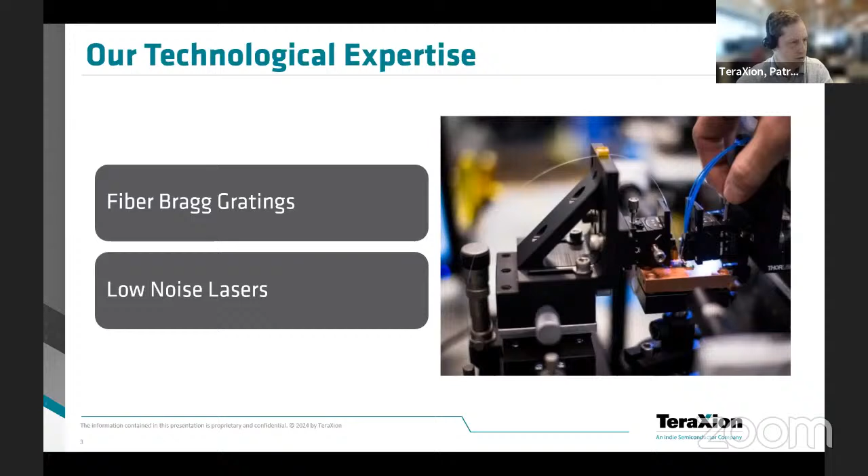And we also have a low noise laser product line since 2005, actually. We've always differentiated ourselves through the quality of our control electronics. And for a few years, we started developing our own chip. This is what's new with our laser product offering, and that's the topic of today's product introduction. So if we talk about the LXM, what is this product and how does it bring value?

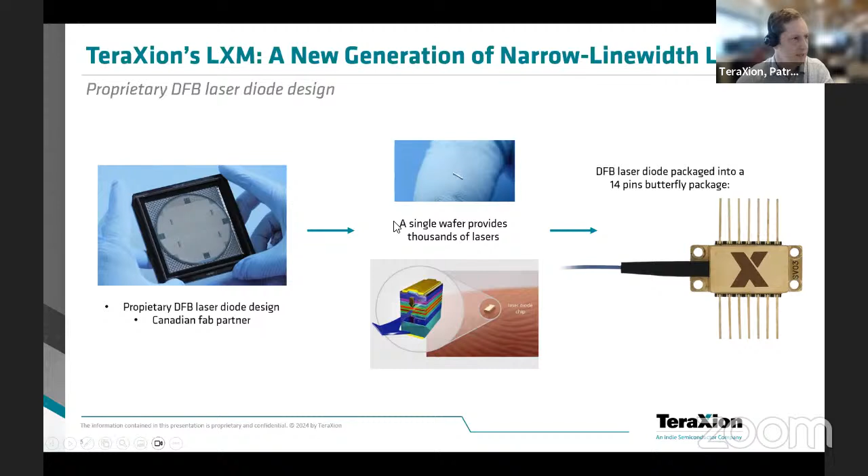So it's a laser module based on a DFB monolithic semiconductor chip. TeraXion now manages the process from wafer to chip to packaging into a sealed and temperature controlled butterfly. So we're fabless. We're working with a Canadian fab company, and the LXM is really a module offering. So it's a turnkey module with low noise drive electronics.

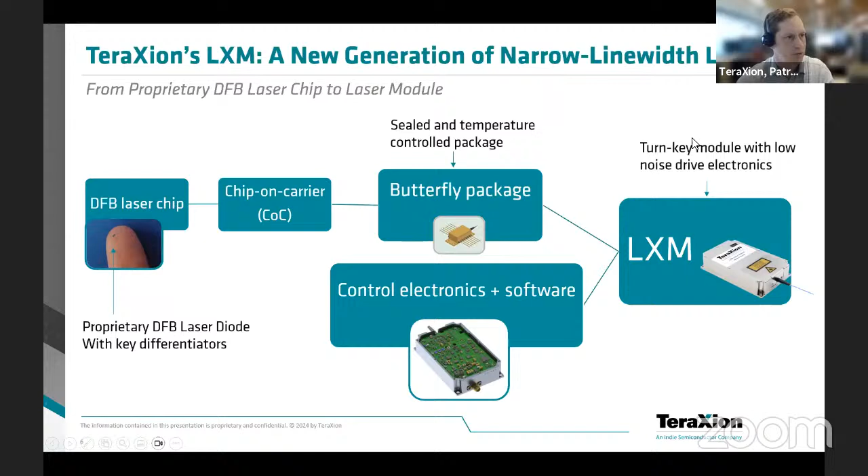I've mentioned the chip. It's a chip we worked hard on the design that displays key differentiators at the performance level. As I said, we manage the process to chip on carrier, packaging into the butterfly, and we add on top of this a TEC controller, low noise current source, frequency modulation circuit to offer a turnkey module. There are two flavors, and by the way, I forgot to mention, the wafers we designed so far are in the vicinity of 1550 nanometers. So this is the wavelength we're working with today.

I've mentioned two flavors: either a DFB laser under direct drive, what we call the LXM-S for standard offering. And we also have an ultra narrow linewidth version where the DFB is frequency locked on a frequency discriminator. This is the LXM-U for ultra narrow linewidth. The frequency locking circuit is built in the electronics. Same for the frequency discriminator, it's built in the butterfly package.

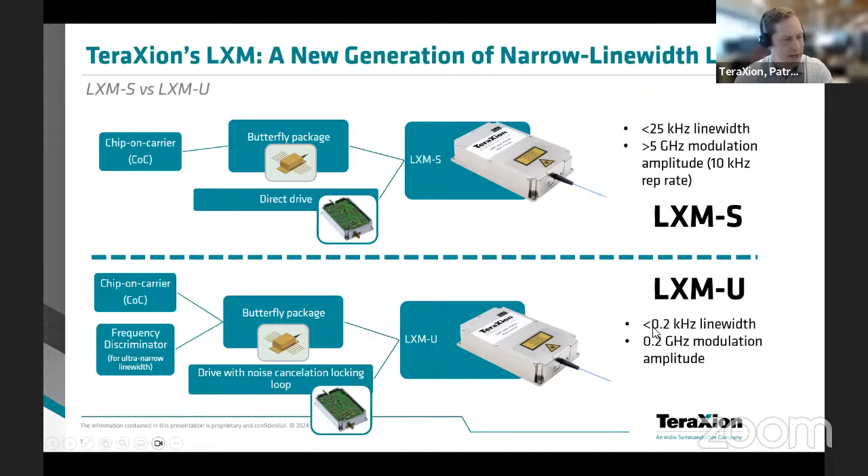In terms of the main performance difference between those two models, the direct drive is the intrinsic linewidth of the DFB chip, below 25 kilohertz. With the frequency noise cancellation circuit, we achieve ultra narrow linewidth. For the LXM-S, the modulation circuit is directly connected to the laser electrode. What limits the modulation amplitude is simply the protection circuit of the modulation circuit. For the LXM-U, considering the laser is slaved on the discriminator, we do not have the same degree of freedom, and that's why the modulation amplitude is limited to 200 megahertz.

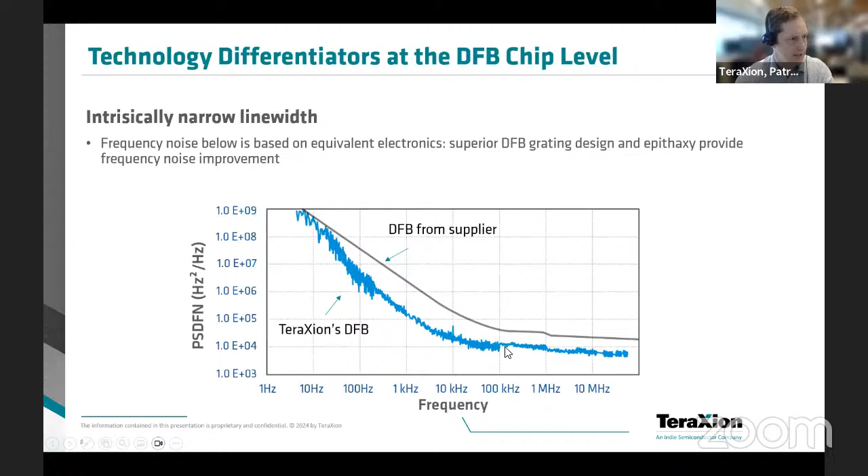Now, if we look at the technology differentiators at the DFB chip level, it's an intrinsically narrow chip. This graph shows a DFB from a supplier packaged with our low noise electronics compared to our own DFB, where we see we worked hard on designing a chip that was intrinsically narrow. The second differentiator at the chip level is that we developed a chip with a flat frequency modulation response that was mandatory for some of the projects we have internally with frequency locking and phase locking loops. So it allows high performance frequency locking and phase locking of the laser.

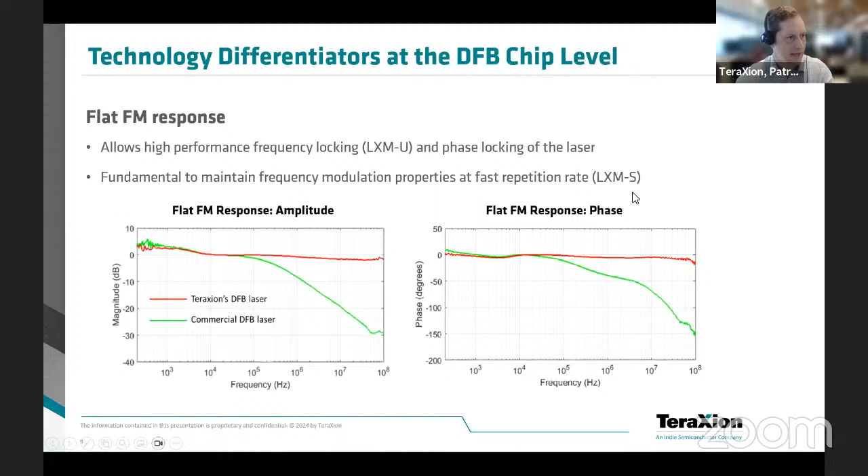For a rugged and reliable laser designed for industrial applications, this low level of frequency noise is pretty unique on the market, and it can give enhanced sensitivity as well as range to sense phenomena that have this signature in those frequencies.

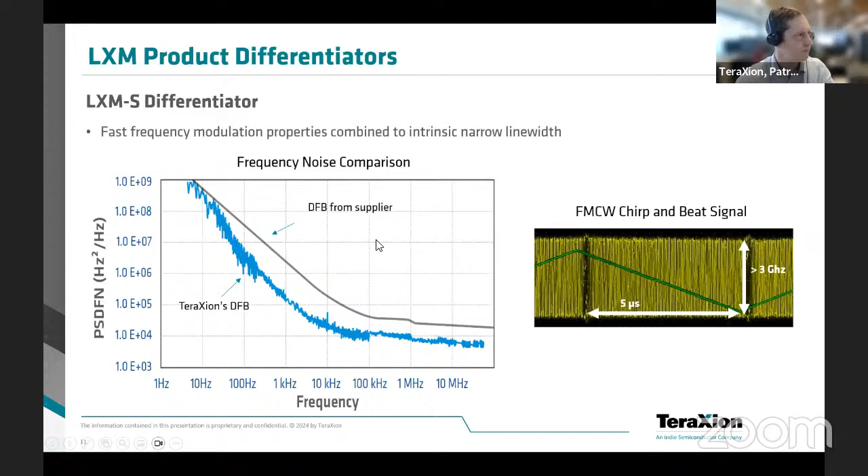Now, if we look at the LXM-S, what's unique with this module is the combination of fast frequency modulation properties with the intrinsic narrow linewidth. So even if we want to modulate it fast, as used in FMCW LiDAR, let's say 100 kilohertz repetition rate, we can still achieve a high modulation amplitude. The chips react well at high repetition rate. And last slide, important to mention, those are rugged and reliable lasers delivered on spec.

We've been in the business of low noise lasers for more than 18 years. We have a history of stability, reliability, and ruggedness. We also deliver low noise lasers on spec with a high level of support. And what's new now with our own chip is that the LXM brings key performance differentiators.

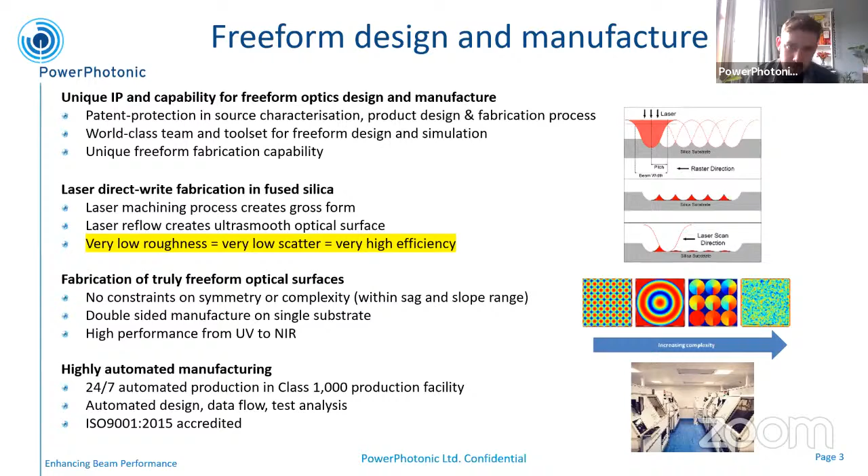So this lends itself very well for these high power applications because we maintain a very high LIDT in the bulk material. So we do a lot of applications like material processing and defense applications like CBC, which I'm going to touch on.

So I've worked in this industry for about 7-8 years, and I've done various different markets over that course. So I'm aware there's different jargon. Sometimes people are aware of certain jargon, and other people use the same term or different terms for the same thing. So just as an overview, when we're talking about power in bucket, which is a key parameter for CBC systems, power in bucket effectively means how much power you have in the center of your beam.

What's unique about PowerPhotonic is that we offer a hexagonally tiled corrected CBC process where it increases the overall theoretical limit of power in bucket that you can achieve. And this is much higher than current research papers concerning CBC, where a lot of them are looking at Gaussian systems, i.e. no beam shaping. The theoretical limit is about 66%. And by using our solution, we can increase that. So that's the benefit that we want to provide.

So the benefits of this, what does that mean in actual real world terms? The advantages would be, obviously, if you have a higher power, you can use terms like defeat time. In defense, there's some questionable terminology sometimes, but faster neutralizing time, if you wish, or a lot further distance, higher propagation. Or if you inverse that, which is particularly important to certain people, it's running costs.

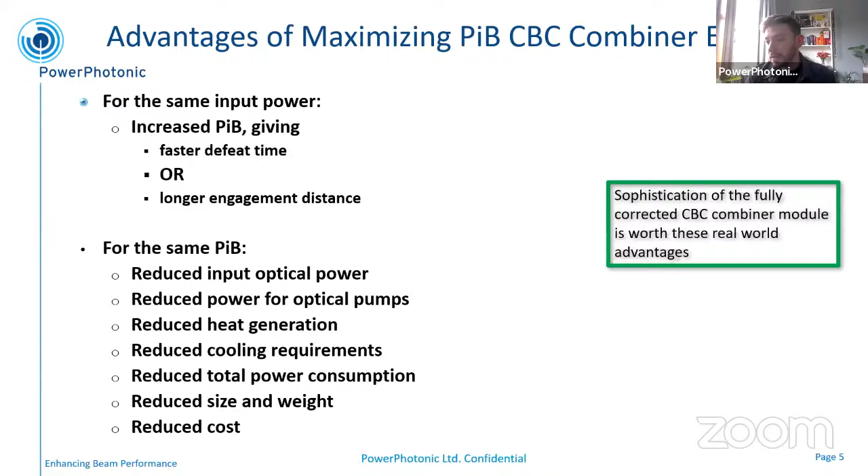But when we're talking about power levels of this magnitude, even 1% over, when you're talking about 100 kilowatts, is still a pretty significant loss, and will again increase your cooling requirements, etc. So these things are, as I said, still in development, with deployment times in the 2030s, although they seem to be getting more advanced now. These will be considerations now, but will become greater considerations in the future.

At the moment, it's more about proving the system in theory, and then moving towards lower SWaP, which is what gets referred to a lot of the time with these defensive applications: low size, weight, and power.

So just to touch on what we've done: since 2002, we've optimized the optics that we make for these different channel systems. In theory, you can increase this to infinity, but obviously in the real world there are certain considerations. It's a terrifying prospect to think about a laser weapon with infinite channels, but in theory this can be scaled up. And the numbers are largely based on the tiling or the packing that you get from a hexagonal pattern.

We've built and tested a 7-channel system, and we've done simulations for the larger channel systems. The point we're at in the company now is that we want to get it in front of people and have it tested in in situ environments. So as an overview, because I touched on a few things there, what is it we provide with this increase in PiB?

If you look at the recent research papers, 60%, 70% is the level they're at now. There are others that are similar or pushing towards 80, but we've got a pretty good solution versus the market, and it clearly has a benefit over a Gaussian system. You don't need to overfill your channels, therefore you don't have to increase your power consumption. It's a monolithic solution, so we can reduce the size, weight, and power of the device. And having a monolithic solution makes it more ruggedized for the types of environments it would be in.

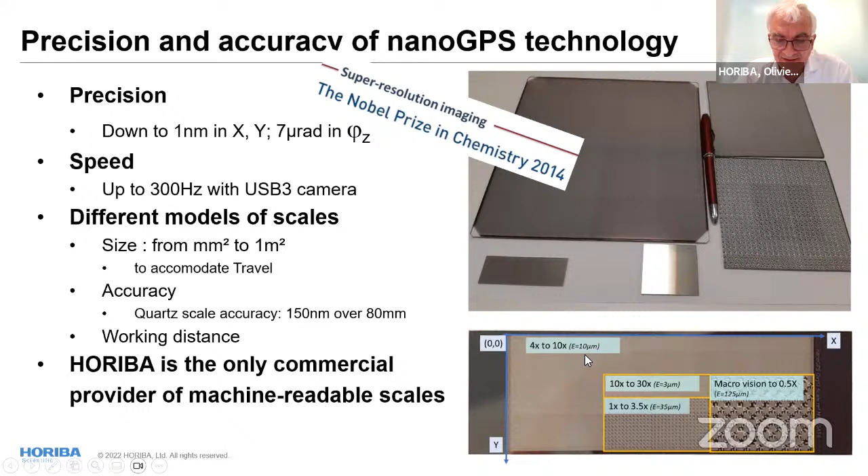And so this is a kind of a slide that can fit different needs, and this is in our evaluation. The reason why we launched this product is that we first integrated this technology in our Raman microscopes, and it was rather successful. So my first message is that if you're producing products that include some motion system and you are interested to establish the stability and a variety of features related to motion, this can be something of interest, especially in the case your system includes a camera or microscope.

Presently, it is used for objective adjustment, meaning when you switch the turret, we have a preliminary calibration that is done with this technology on a very tiny scale. And we just take the image with different objectives and measure the position, and there is an offset which is attributed to the decentering of the objective, and that we can correct in this way.

Our R&D department also adopted the technology for quality control and for qualification. For example, we can detect any moving stage issue. We can detect also any stability issue. And last but not least, software debug, because sometimes you're giving instructions to your displacement tools, but it's not always moving the way you think it is.

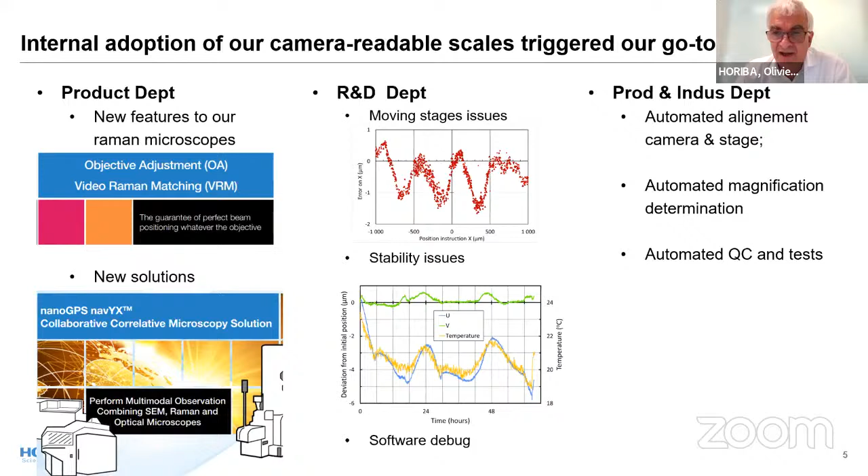Production and industrialization department also used this for a variety of features, including automated magnification determination and also automating alignment between camera and stage, and automated QC and test, which again can be interesting if you're producing some instrument where you need to be sure of the accuracy, reproducibility, stability, and all this kind of thing. And service department is also beginning to use it to check issues at a customer site, because it is very easy to use this technology at customers.

So we put several of the kits, including the scales and the software. Because this is rather new technology, we found that people wanted to play with it before, and it was very helpful for them to figure out how they could use this technology to solve their positioning or drift or reproducibility issues. And our discovery kit allows you to do hands-on nanometrology with less than €1k, and it is available. We have it in stock. Of course, we have larger, more accurate scales.

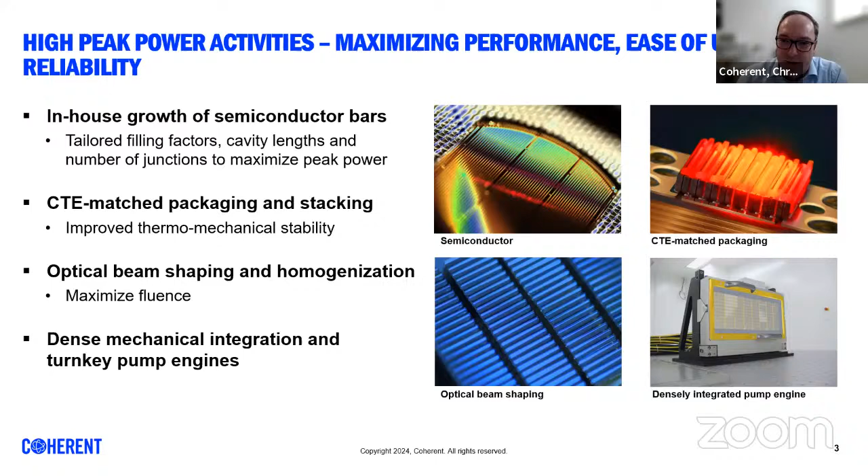So due to such a vertical production, we cover the entire value chain from wafer process to temperature coefficient matched packaging, including optical beam shaping and dense mechanical integration up to turnkey pump engines. Scalability of pump power can be reached by vertical as well as horizontal stacking of diode laser bars. Optical beam shaping allows brightness conservation and maximizes fluence. We offer dense mechanical integration, also leading to turnkey pump engines, of which I will show you some used in recent applications.

So how does such a packaging look like? To build a monolithic stack, the unmounted bar material from wafer is soldered into two copper tungsten submounts, which are expansion matched to the aluminum gallium arsenide bar material. So various heatsink designs carry a different number of bars and are available in configurations that serve a variety of applications, either integrated in laser systems or as a direct beam source.

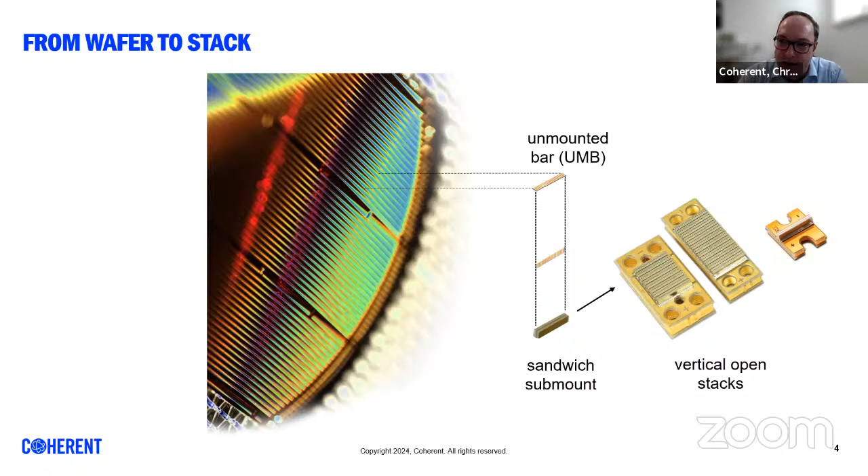These hard-soldered sandwich structures, submount by submount, will be backside soldered onto a ceramic plate, electrically isolating it from the cooling. There are conduction and water-cooled versions. The latter can be used for laser pulses up to a few hundreds of milliseconds, for example, in hair removal applications. However, these of course also support few millisecond pulses at high power for pumping applications and diode pumped solid-state lasers.

We can attach micro-optics to collimate both the fast axis using a single lens or the slow axis with a lens array. Further optics such as volume Bragg gratings from our fab in Monrovia and even homogenizers from the colleague that just presented can be used. Also wavelength narrowing, of course, by the volume Bragg gratings and homogenization by the other optics.

So I will now show an example how such diode laser stacks will be used in laser-assisted inertial fusion energy. We heard about this quite a lot, so it's a quite interesting topic at the moment. And the latest results shown by Lawrence Livermore in December 2022 demonstrate the successful use of lasers for fusion energy achieving ignition. This means producing more fusion energy than the amount of laser energy delivered to the target.

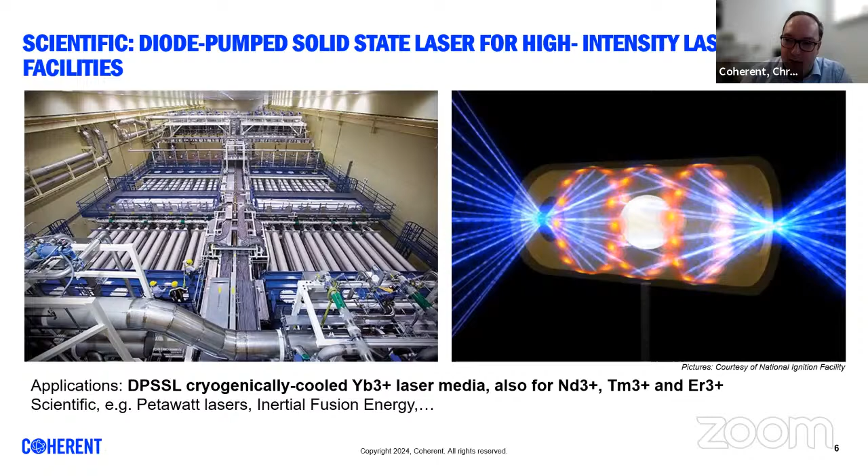So back to our laser diodes, we show one of our latest stacks supporting up to 600 watts per bar at the absorption wavelength of ytterbium around 939 nanometers. The stack design offers up to 4.8 kilowatt output power. It's fast axis collimated and designed in a way to build an infinite assembly. So latest bar material and optimized cooling designs will even offer power values of more than 1 kilowatt per bar.

For DPSSL applications, further active laser dopants of interest are, for instance, neodymium, thulium, and erbium, and the corresponding pump wavelengths are covered by different semiconductor materials that we can also process. For instance, gallium arsenide-based 885 nanometers, 938 nanometers, 790, and indium phosphide-based 1532 nanometers. And what's the next step? The aim is now to maintain the spectral properties of central wavelength and spectral width in setups of hundreds of these stacks.

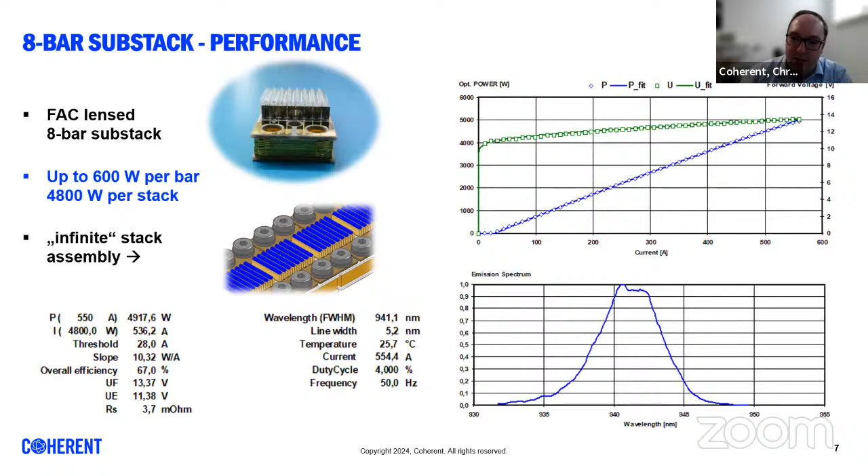So each pump engine contains 100 stacks. The short pulse wavelengths of the bar material have been determined for each bar after processing. Binning of bars took place to further narrow the spectral properties of each stack to be built. So wavelength tuning of grouped stacks by operation bias current, cooling temperature, and coolant flow rate enables the narrowest line width, even using such a large amount of stacks.

Okay, you know, we are best known for the website, for the marketing opportunities, but even before we started that in 2012, we already had for several years the RP Fiber Power software, and now we have version 8 of that, which is a significant step forward, as I will show you. So first of all, it is useful for simulations, mostly just computer simulations of fiber amplifiers, fiber lasers, but also passive fiber, things like coupling of light between different cores in multi-core fibers, or whatever you can imagine, actually, fiber couplers, all sorts of devices.

Generally, simulations are very important because they produce detailed insight into the inner workings of devices, and that they do much more than measurements, and at the same time, without much effort. So you get much more information much more quickly, and that is, of course, very helpful when you do development of such devices like, say, fiber amplifier systems. You better understand the performance limitations and find optimized device designs. You can thoroughly check designs before buying any parts and building a prototype and testing it.

And you can find out the cause of unexpected behavior more quickly. And you get inspired for new ideas when playing with a model. Often without a plan, you play with it, you learn something, you find, oh, I can actually use it in this or that way. And the bottom line is you get quality results of your R&D work faster and cheaper.

Lab work still stays necessary. You eventually have to realize your prototype and test it, but it will be reduced and will become much more efficient because you're no longer trying things which you could have known won't work in any case. So you improve your designs before trying something in the lab where it becomes cumbersome and expensive. So for that, you need a powerful simulation tool. You need something to produce deep insight.

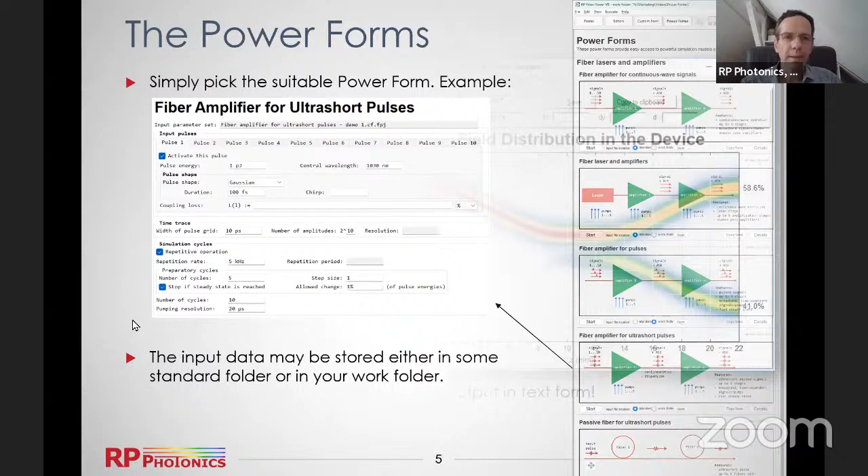There are further nice, not so new, but still very nice and optimized features, very powerful diagram display windows. For example, you can always switch back to the last version of a diagram. That means if you changed some parameters, did the simulation again, you can always look back. How did it look last time? What changed actually as a result of my change? That's just one example of many for very nice features.

We also have very nice interactive windows for interactively exploring beam profiles. That's when you're doing numerical beam propagation, or actually when you work with ultra-short pulses, you can select the position in a fiber and then exactly inspect the pulse which you have at that position.

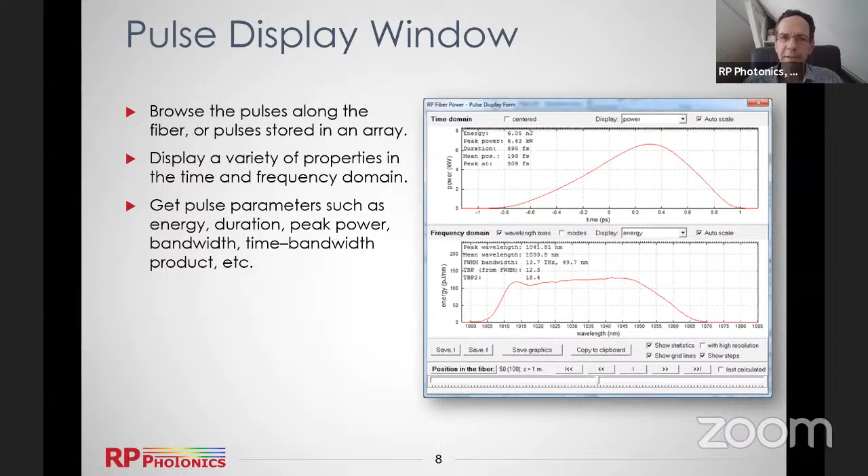Then documentation is, of course, very important. Hopefully you don't need it too much when working with the forms, but if you need it, it's all there, explained in detail what the model takes into account and what is assumed, etc., which model is suitable for which cases, etc. And as I said, we are happy to help. My colleague Gareth Moore and myself, we are doing the development and the support and help our users very much to get their things done efficiently.

Yes, my name is Emric Verwaerde, and I am the Laser Cheval CEO. Thank you for giving me the opportunity to introduce our new laser machine, the Quartz Geode. First, some words about the LASIA group that we joined 2 years ago now. We are present all over the world with 6 plants and some distributors.

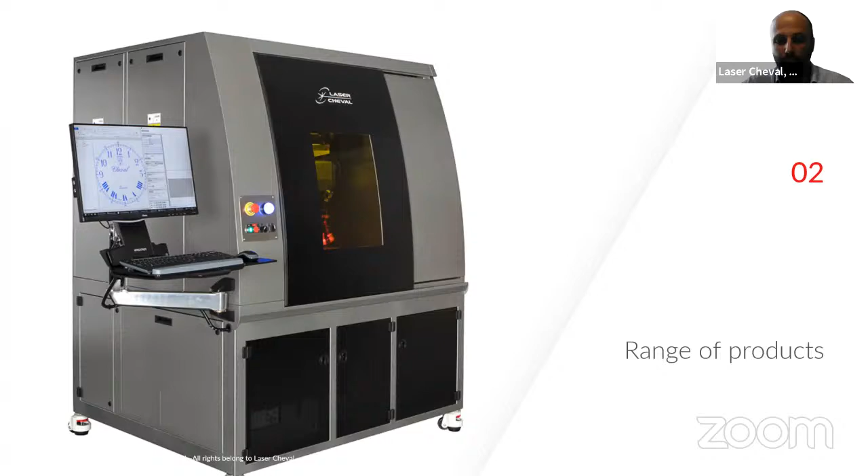Laser Cheval is based in the east of France. It means an area well known for its skills in micromechanics. The range of products that we provide starts from optical systems for lasers and goes to a standard range of machines, a large range of machines, and also custom laser machines.

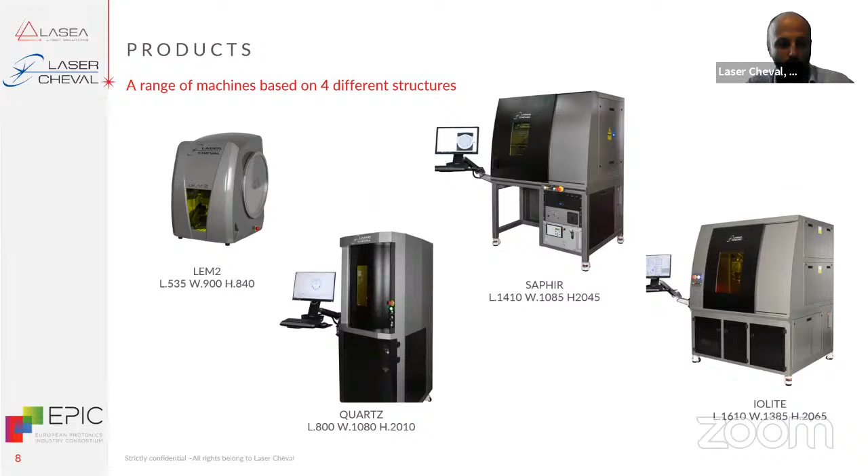About Laser Cheval, we have a range of machines based on 4 different structures, from the LEM2, the smallest one that you can see at the left-hand side, to the IOLITE machine, which is the biggest structure. We are working only on infrared lasers, so from continuous wave to femtosecond lasers, so continuous lasers mostly for welding applications, and femtosecond are used for highest quality machining applications.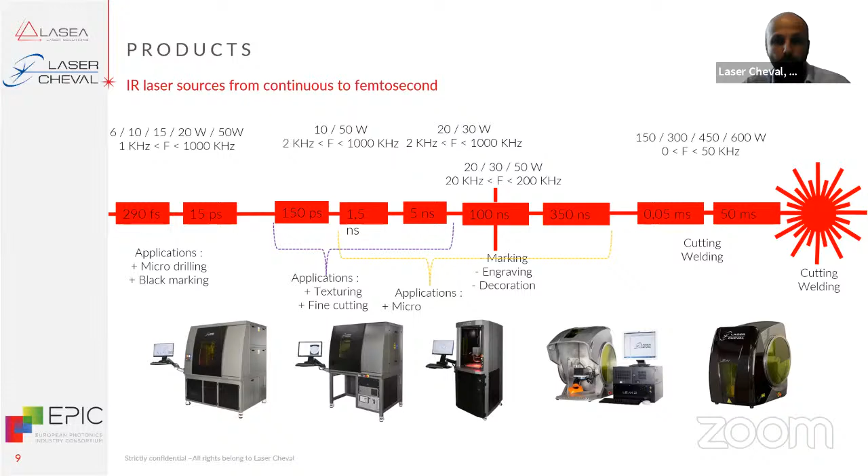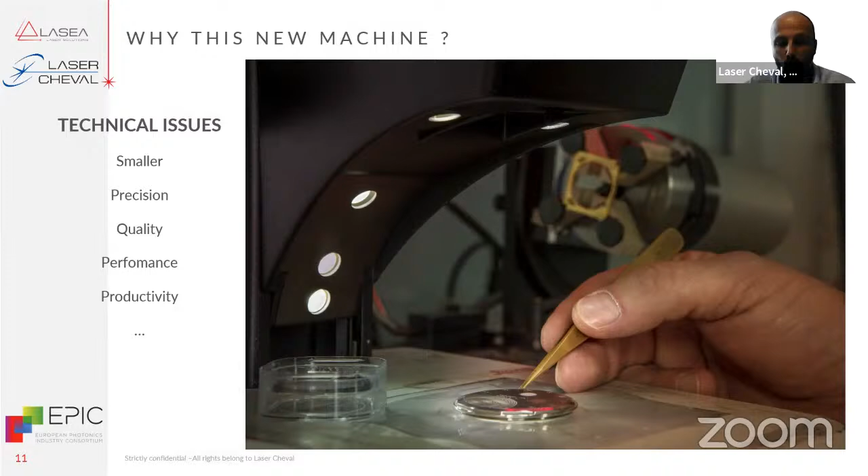We can add a lot of additional equipment in our machine: mechanical axes, automatic or manual vision, optical options, and so on. Let's go deeper about the Quartz, which is our new machine that we presented 2 weeks ago in Geneva. 2 issues drove our development. The first was a technical issue, of course. We are always trying to do smaller and smaller parts, more precise, more quality, of course, with more performance and more productivity. But it's not enough.

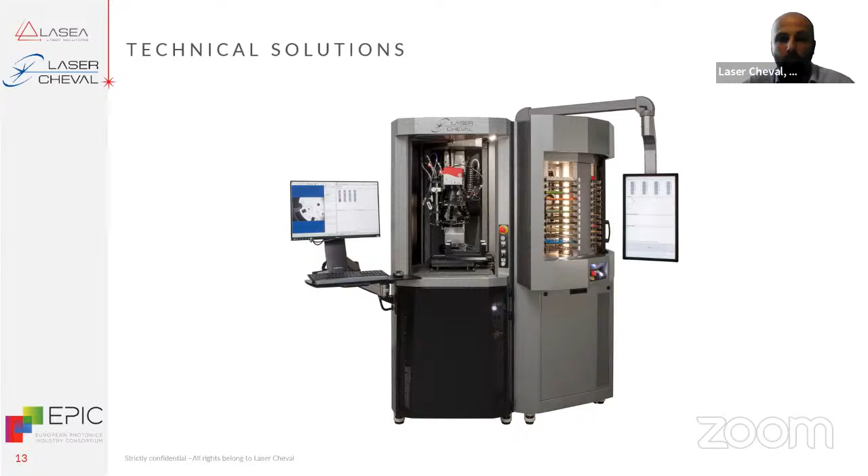Today we have also to consider ESG issues, and use less and less raw material, less and less energy, produce less and less waste, and so on. So it's what drove our development, and this reflection gave birth to the third generation of our Quartz machine. This machine can accept all of our options. It means that we can put lasers from continuous wave or CW or QCW lasers for welding applications, nanosecond lasers, picosecond lasers, and also femtosecond lasers.

We can put up to 5 mechanical axes in the machine. And also, more than the scanner head, we can also put a third optical axis to machine or to work on 3D parts. We also propose a large range of focal lengths and up to 3 cameras, and of course lighting adapted to what we need.

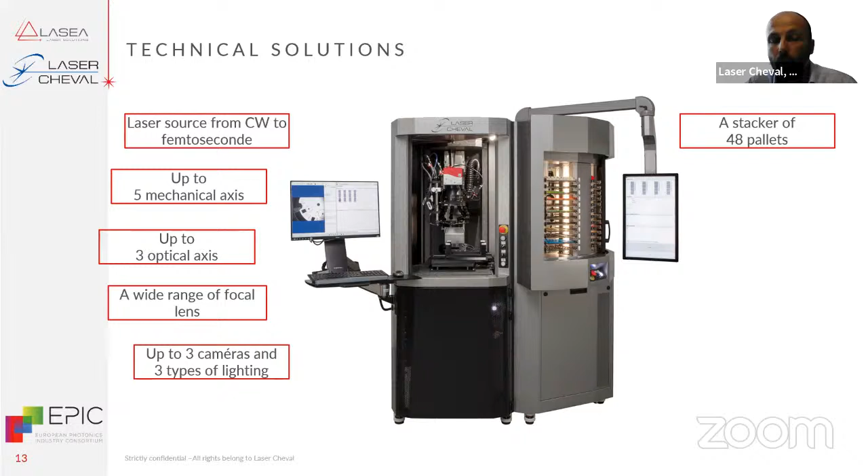Something new we developed by ourselves, a stacker with 48 pallets. It's 4 stacks of pallets, and we can parameter 3 different heights of pallet, and it's also compatible with backlight. If we need it, it's also possible. It means that we can have up to 2 square meters of production for only 1.5 square meter footprint. All this is driven by our own software that we also develop ourselves.

But all this, perhaps more importantly, is modular. It means that we define with customers what they need, but above all, it is scalable. It means that if your needs change, we are able to upgrade the machine and add or remove some functions. And a lot of functions can be added at your factory. It's not necessary to bring the machine back to our plant. So it can be really interesting, even if you need the stacker and you don't plan to use it at first, you can add it directly at yours. You don't need to send the machine back to Laser Cheval.

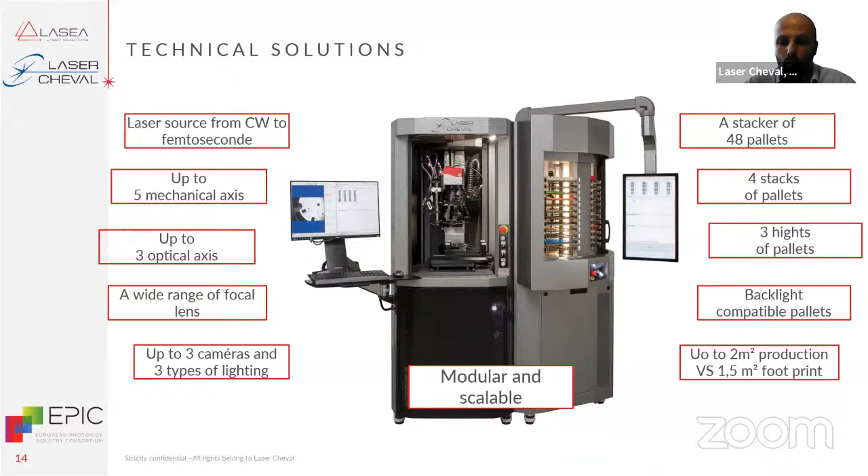I would like to point out one innovation that I think is perhaps really interesting for a lot of customers, because we don't do this machine only for mass production. We keep it very versatile. Even if you can produce large series, you can also produce some prototypes and small series.

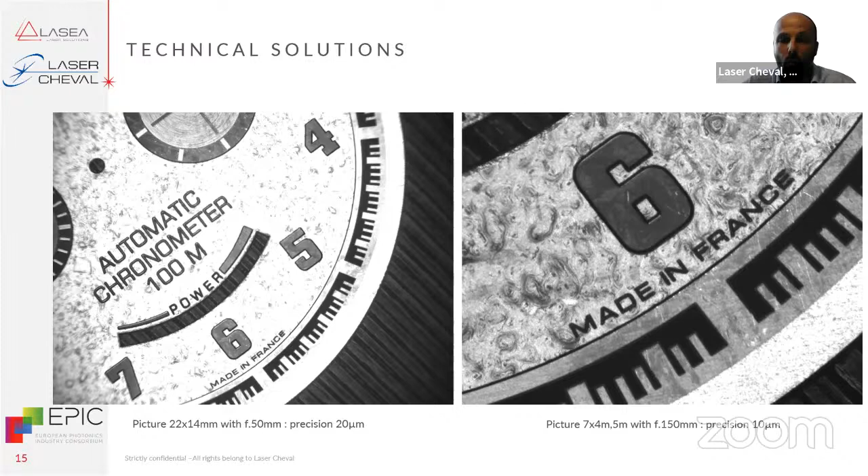And for this, we use a lot of different cameras. I said that we can have up to 3 physical cameras, but we can also have a lot of virtual cameras. For instance, here you can see one camera with a picture of 22 by 14 millimeters with a focal length of 50 millimeters. It means that you can have a precision of 20 microns. And on the right-hand side, you have a smaller picture with, of course, a longer focal length and more precise. You can go down to 10 micrometer precision.

We introduce a new possibility with our camera. It's what I call virtual camera. We can have stitched pictures. It means if you have big parts, or if you don't want to do specific toolings and you want to find the parts in a bigger area, you can use stitched pictures and do, for example, the localization directly on this picture, but the precision, of course, will be low, around 100 micrometers.

But you can also do pre-visualization, pre-localization, and then when you find the part, you can go and use a more precise camera and do the localization. So pre-localization and localization. It's really interesting if you have only some parts to do and you don't want to use a fixture, for example. So you can use fixtures and the stacker for large series and just work on parts like this without any fixture.